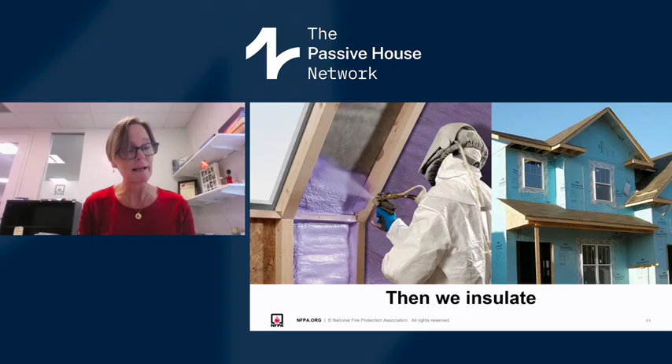Now, we want to save energy, and passive houses are fabulous to do. So what do we do? We insulate. Of course we do. And depending on the choices that we have when we insulate, it could potentially mean an additional layer of fuel. Often, for instance, spray polyurethane or adding polystyrene boards on the outside is adding a layer of fuel to this package that we have in the building. So something to consider as well.

And as we take this whole nice package of lumber, wood-based boards, and the insulation, of course, now we're going to make it all look pretty from the outside. So we wrap it up in beautiful siding and roofing to have it all weatherproofed in the end. So this is what I looked at when I said, okay, how much is there then in a building? How much fuel is there?

So I made a very simple calculation on a 2,000 square foot home, which some would say is a small home in this country. But that's what I did, and did some rough calculations on how many pounds of fuel I had in there. And these are my results. I looked at the lumber and the plywood, the foam sheathing, spray polyurethane, wood siding, asphalt shingles, and calculated based on information sheets from the manufacturers.

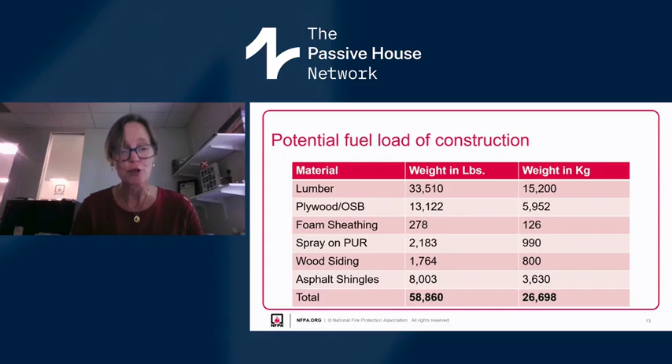I got to a total of almost 60,000 pounds of things that can burn just in the structure. So we have so much in just the building itself. I'm not looking at the interior, not even looking at floor coverings, electrical, plumbing, or anything like that. This is the raw structure. So this is the potential fuel load that we have in each of the homes we have out in these environments.

And just to give you a little bit of an idea of what that means compared to the natural environment, according to information that I found, a 50-foot tall pine tree weighs approximately 2,000 pounds. So if we have a building here with almost 60,000 pounds of combustibles, we now have what equals about thirty 50-foot tall pine trees on our property instead of a building. That's a very dense woods that will be burning there, but this is now our building instead.

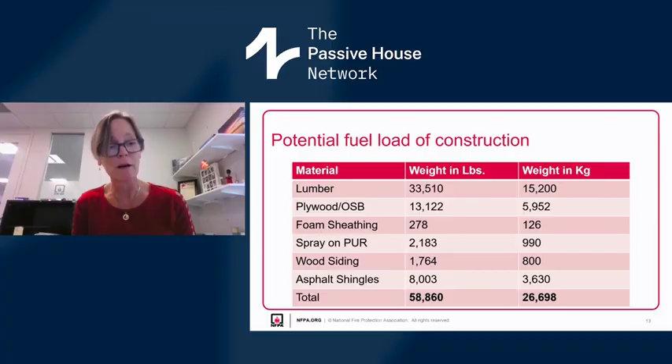You might say, why are you calculating everything? This is why. Because it burns everything that can burn when the fire gets serious enough. So we need to consider how we build the buildings. And I'm not saying that we should change our traditional way of using wood, etc. No, but what we do have to do is to think about how we can protect it when we do have such a condensed fuel package. How can we make those parts of the buildings that really interact with the fire first better protect the rest of the building?

So just to get into the resilience, resilience really has to happen through risk management. And very simple in my view, risk is hazard times consequence. And the hazards that we have out in the Wildland-Urban interface are the vegetation, the topography, the weather and the wind. And yes, we can control vegetation and we can control where we build related to the topography. Weather and wind are out of our control.

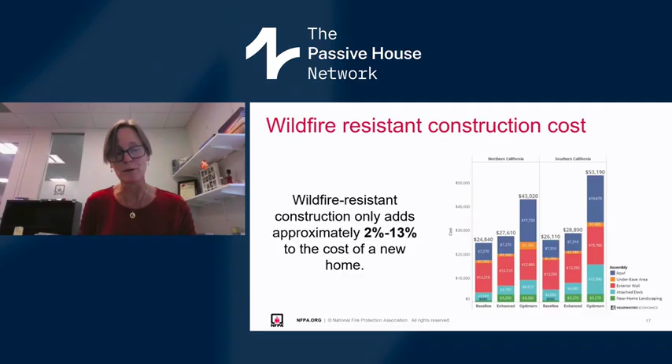They're evacuating us. Oh my God, oh my God. Holy cow. That's crazy. On December 30th, 2021, the most destructive wildfire in Colorado's history, known as the Marshall Fire, destroyed more than 1,000 homes in the suburbs of Denver and claimed the lives of 2 people. This place is burning over here.

The Sobtis were one of the many families who lost their home. Amita, her husband Manu, and their 2 kids were on vacation at the time of the fire and watched everything unfold through their security cameras. And we were on a beach, I remember, and we were in disbelief. We were like, this can't be happening, we'll be fine. But when they returned to Colorado 5 days later, they saw firsthand the damage that was done.

It was just gone, it was ashes. One car was in the garage that had blown out pretty much, and the garage door had melted and fallen on it, and the rest, everything was ash. It was a hole in the face of earth, and it was disbelief. I could not believe that the entire neighborhood was wiped out with that one fire.

Wildfires are not uncommon in Colorado, but the Marshall Fire was an outlier. Most fires affect rural parts of the state, and this fire destroyed suburban neighborhoods. And it happened in the middle of winter, leading some scientists, like Cenlin He from the National Center for Atmospheric Research, to conclude that fire season, once limited to the summer, is now a year-round threat.

The hope is that more homes in the neighborhood will sign up for the design, because the more buildings that meet passive house standards in an area, the safer that area may become. So as each house becomes more resilient to fire, it protects the neighbors, and the neighbors protect the neighborhood, and the neighborhoods protect the community. So there's this kind of cascading effect. Every good decision making the homes better actually improves the entire community as a result.

Great, thank you so much.

In California, I can tell you, $40,000 is much less than 13% of the house cost of a new build. So it's even better news in that sense for a fully rebuilt house.

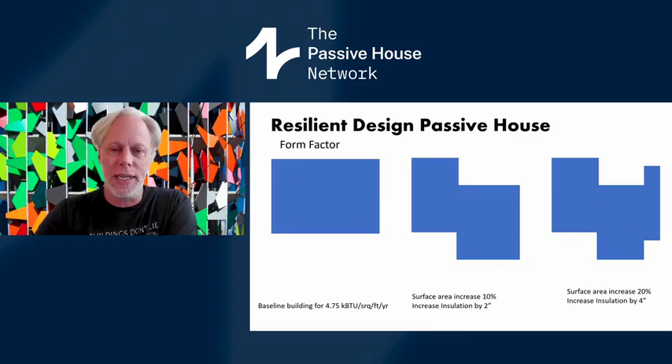And then passive house, of course, you guys all know this, that we can build different form factors. It's just that we take on a penalty of that. So we're not saying that we need to build boxes for passive house, and we don't need to build boxes for fire resilience, but it does have an impact on both terms directly.

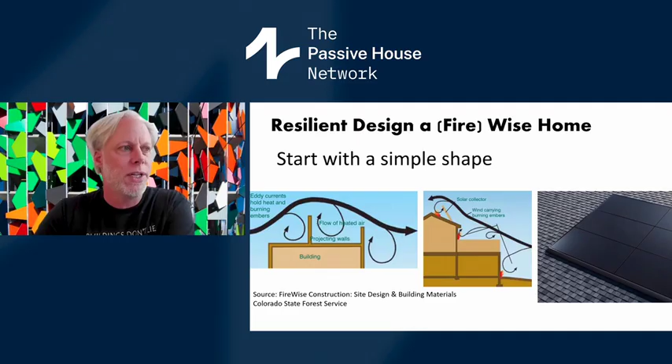And even little things like solar panels. I was looking at these Tesla solar panels, and they have this nifty trim around them, so embers can't really get underneath the solar panels, in between the roof and the solar panel, for instance. So even small details like that really count.

And then when we get into the actual fabric of the building, we often see buildings that we like to ventilate. We love ventilating roofs because we don't want rotting roofs. That's great to get rid of moisture, but that's really, really good to introduce embers into the building system. So traditionally, for almost all my houses, passive houses, including the one down in Masonville, we like to use cathedral ceilings with an unventilated roof system.

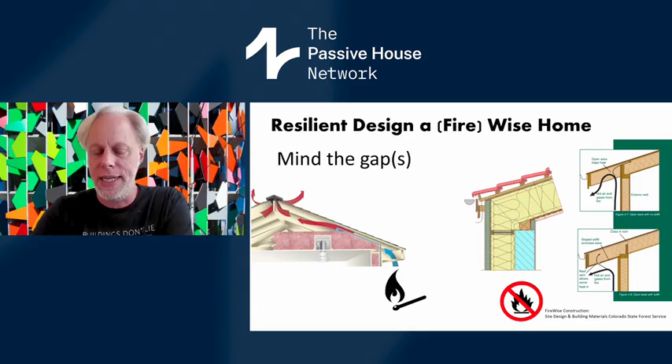That seems to have made a significant difference both in the performance of the building as well as the fire resilience. So we don't use ventilated facade systems outside of just between perhaps the exterior and the rain screen. And certainly the roof, we really don't encourage to ventilate them. And I'll show you a final detail that we are using now for fire rebuilding.

The other big thing we're finding, at least in Colorado, I've seen significant window breakage in the mountains. When we have this fuel load that's a forest right next to your house, or perhaps another house that's on fire, often the windows break, and it gives you limited time when that fire radiant front comes. That one pane, two panes break, pretty much, even if you do everything else correctly, you have a completely compromised building. So the idea of using triple pane passive house glass, preferably a little bit smaller than larger, the triple pane buys you significantly more time when that glass pane breaks, just from that first radiant fire front.

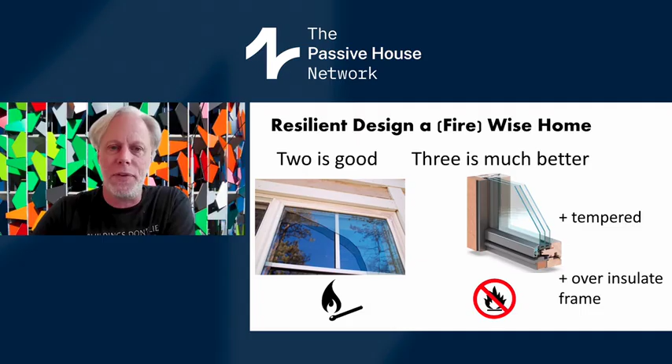The other thing that we do in passive house, which I think is really fantastic for fire resilience, is we over-insulate the frames. So the frame itself is protected from embers lodging into it, especially if we use a material that's non-combustible around the frame itself.

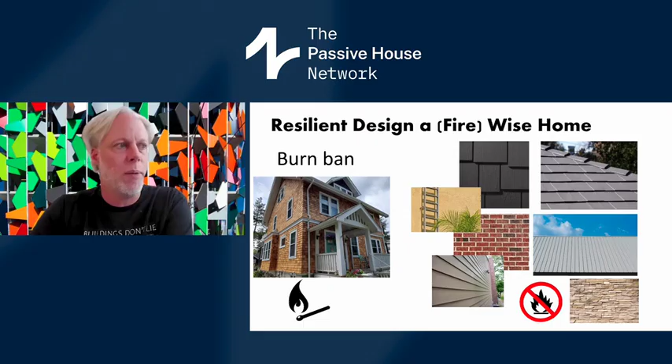And then speaking of materials, of course, we know we don't want to just clad the building in tinder, so a little fire can start right anywhere around the perimeter of the building onto the building. So, right now, of course, we have stuccos and metals and fiber cement and brick. There's a pretty significant range of great materials to work with. A lot of them are more expensive. I think this is where the cost component comes in, but they also can be significantly more durable. For instance, the metal roofs are much more durable than the asphalt shingle roofs. So we love to use those on all the projects if we can.

Here's a project right next to my house that I built, designed, I think it was completed a year before the fire on our mountain. And thinking about fire resilience, we clad the entire building in metal, the roof and the siding. And in the front, we actually used cork. And cork is a Class A fire resilient material if it has a solid substrate behind it.

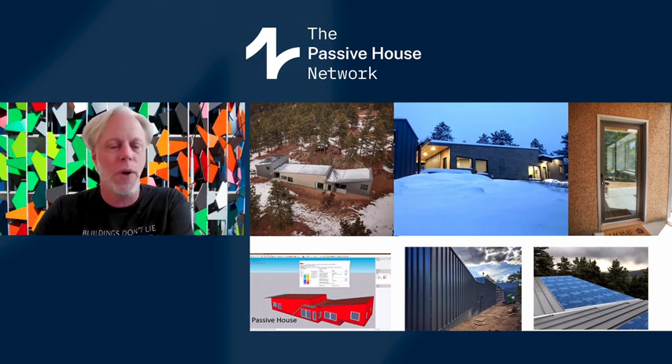So that was really interesting, not necessarily having to use stuccos or fiber cements or even metals. We can still use organic, softer materials on siding. We just have to be really careful and selective and experimental and really go out there and do research and see what works and what's available. And it feels and smells great, interestingly enough, cork.

And then once we get into the bones of the building, as we talked about earlier, spray foams are basically gasoline in solid form. They burn extremely efficiently.

So avoid them at all costs, no foam construction. But also fiberglass is not really particularly good. Air goes through fiberglass quite easily. So if you do have a fire event within your wall system, flames can get through that fairly efficiently with fiberglass. So almost exclusively, we use on interior walls a rock wool type of material, which has a melting point of like 3,700 degrees. So basically, it does not burn.

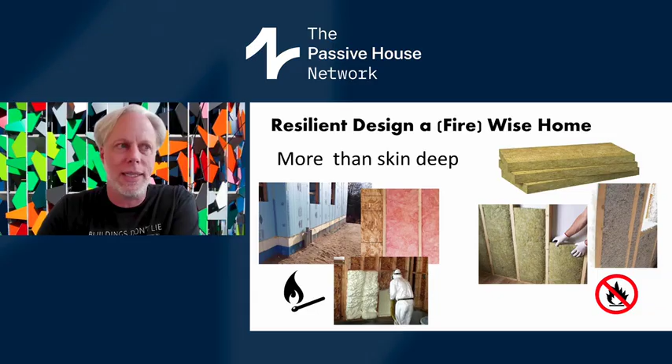And then cellulose is low embodied carbon, low cost. Also, it doesn't hold flame at all. It doesn't really melt. It's quite stable in a flame event. But most importantly, because it's dense packed, it doesn't allow air into the wall cavity. So we eliminate air; even if we have fuel, we don't have fire.

My own passive house, certified I think 8 years ago now, was the first one in Colorado. We did cellulose on the inside, rock wool on the interior wall. Cellulose is the main insulation material, and then rock wool on the outside is a board material. So 2 inches of that material. It's quite rigid, so I found it to be pretty easy to work with.

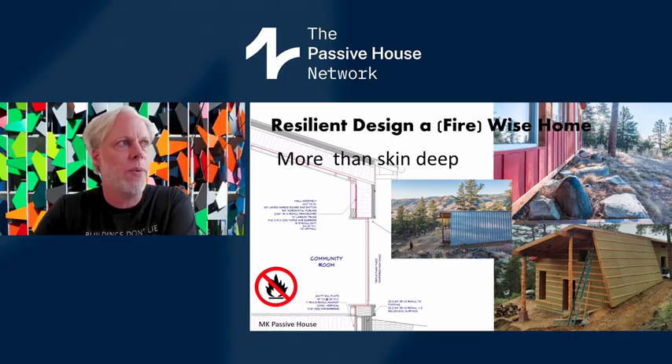And then we used metal for siding and fiber cement over that. So it's a pretty fire resilient wall, especially with the triple pane windows. I used uPVC for the frames, so that might be the weak point in this particular building system.

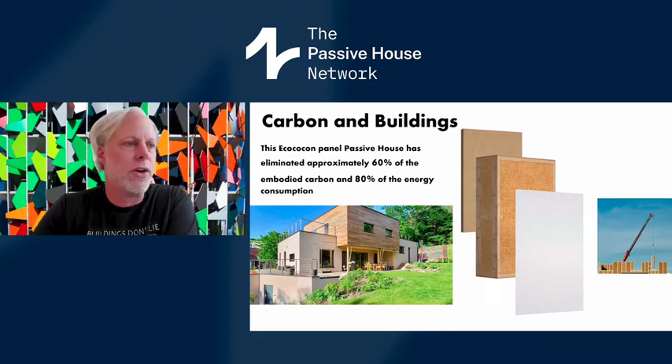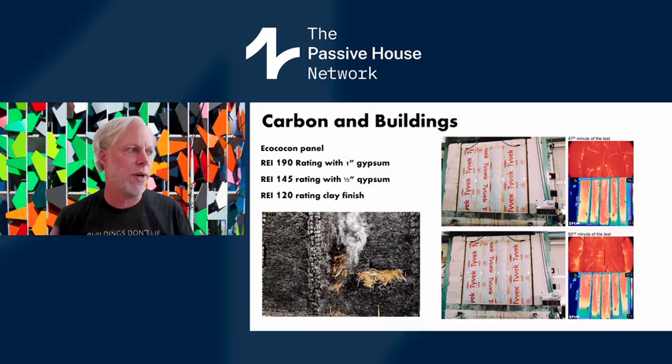And then when we look at lower carbon materials, EcoCocon panels, for instance, are a prefabricated panel made of compacted straw. And straw is incredibly fire resilient. In fact, it can give you a 190 minute rating if you put a gyp board on the inside of it. Because of that lack of oxygen, straw itself, when it's compacted, does not support flame really at all.

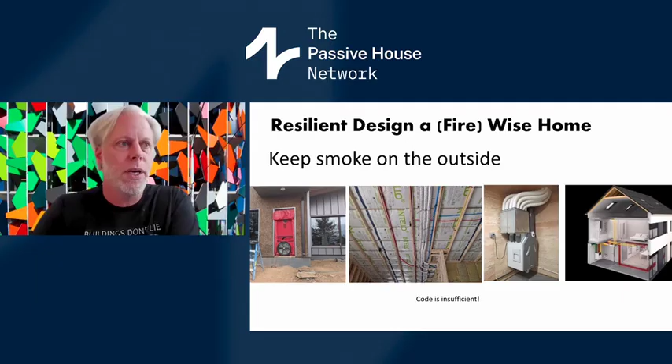And then, of course, the other side we don't talk about. Most people aren't going to be affected directly by fire, but by fire smoke. Massachusetts right now, all over the Pacific Northwest, California, Colorado, it's become a regular event. So passive house naturally is airtight with ventilation. We can do quite a bit with that ventilation in terms of controlling the air coming into the building.

And a quick test they did in Australia, in Canberra, the capital. There are 2 passive houses built by this architect, extremely thoughtfully done buildings, the exact same building twice. In one building, they actually tested how airtightness during an extreme smoke event affected the building.

On the left-hand side, you can see that the outside air is quite polluted with 600 ppm, or I forget exactly what. I'm not a metric guy, so I'm not exactly sure what that size is, but relatively speaking, the blue line's the outside. The red line is a typical house, and then the yellow line is a passive house.

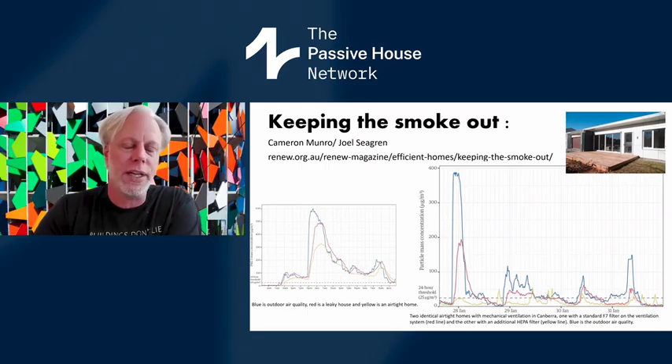So the passive house is half of what is outside, quite significantly better than a typical house in the city. But once we compare that to a passive house with an F7 filter, the equivalent of a MERV 13 filter, compared to the standard passive house without high quality filtration, it brings the level down to what's considered healthy indoor air quality, even in extreme smoke events. So that should be standard building practice for anybody who has a potential smoke event.

For the fire rebuilding for the Marshall Fire, which destroyed about 1,000 homes 2 years ago in December 2021 in Boulder County, we lost a lot of houses. So we're rebuilding a number of fire houses called the Restore House. And we've been going back and forth quite a bit on the detailing, especially with the roof system.

In this case, we decided that we can ventilate the roof. According to code, we need to ventilate the roof systems, which is exactly what we don't want for a fire condition. So we're doing a perimeter vent around the entire roof system, with about a 3/4 inch gap between the insulation system and the roof decking, putting a fireproof membrane, and then a metal roof on top of that. That's one of the many details we're doing. We're also wrapping in the 2-inch rock wool board.

And we feel that this will be a pretty fire resilient building, even as these neighborhoods go up, if the neighborhood house next to it goes. We hope and feel somewhat confident that this house is survivable in that condition. And even with the extreme fire event, just the ventilation system, we're putting these ember blocking vents into the HRV intake. So if there's a fire event coming, basically the vent will swell shut and close off the house to active embers coming into the building.

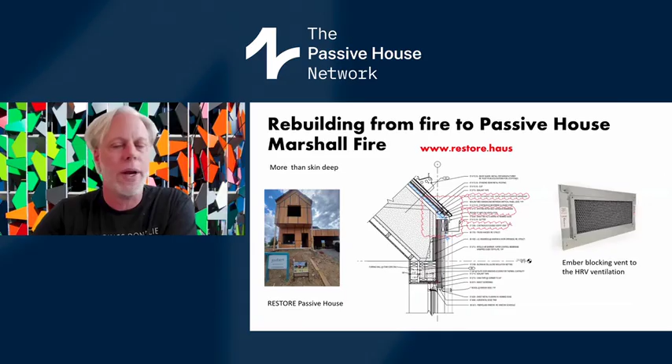So it's those little details we're constantly looking at, trying to think of. There's more to learn to come, but this is kind of a good start. And the synergies between what we're learning with typical classic passive house detailing and then adding the fire resilience is a very, very small lift. And it's just a matter of adding a couple of extra details and material selections that make these buildings work quite well, I think. So that's the end of my presentation.

Hi, everybody. I'm Rob Nicely. I'm a general contractor in California. I own a company called Carmel Building and Design. We work on the Central Coast area, and my part to add is to take a look at a house that we built that survived a fire late in construction.

And something that was noteworthy about this project for me was that this was the first client I ever had who actually came to me wanting a passive house. And because they lived in an area where the risk of fire was high, they also explicitly said that they wanted the house to be very resistant to fire. So an ideal client in that way. This house is far out Carmel Valley, past the point where there's a lot of people.

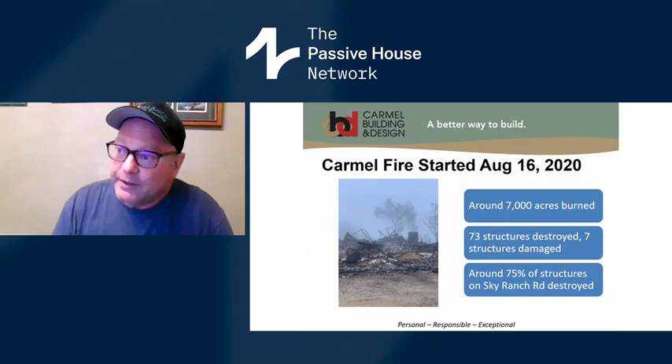And again, this house was under construction when the Carmel fire happened in the summer of 2020. This was really the center of where that fire was, and it's on a ridge, very steep incline, and so the fire just rushed up to the top of the hill. And as a consequence, most of the houses on that street burned, were completely destroyed during the course of the fire. So this is a picture of the remains of one of the houses on the street.

It was a small fire, and this isn't a very heavily populated area, but again, we were right sort of in the worst place. This is looking off the back deck down towards the neighbor's house, which was destroyed. So we were far enough along that our framing was covered up. And so I just want to run through the materials and strategies we used. Andrew talked about a simple building form. And again, because this was a passive house, the clients explicitly wanted that.

We had a simple form, and the long axis was oriented so that we had a really good southern exposure, which also coincidentally and happily faced them to the Los Padres National Forest and this beautiful view. In this case, we wrapped the house with exterior insulation, 2¼ inch Gutex, which is a wood fiber product, but very, very slow to catch fire. In fact, on the Gutex website, they show the test where they hold a blowtorch on it for 20 minutes and then look at how much charring you get. So very difficult to ignite.

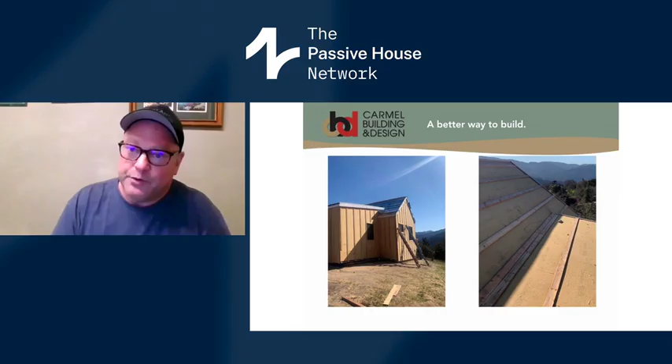This is the only time I've used this product. Normally we use rock wool. I'm doing another certified passive house right now where we're using rock wool, which can be the exterior board insulation, and also it comes in batts or blown in material that you can put in the framed cavities as well. The exterior finishes were stucco and Hardie board, cement board, horizontal siding. The roofing material was steel standing seam roof. We had triple pane windows.

And the only area that we had that was, you can see that the whole house doesn't have any eaves. So there was no condition where we needed to deal with the eaves. The area pictured here, the entry, was the only place where we had a small area that was outside of the conditioned space. And so this was the only place where we needed vents.

And we put in a couple of Vulcan vents, which are of the type that Andrew mentioned, that when they heat up, they swell shut. So you weren't going to get air infiltration or embers going into the building through that. So again, simple form, fireproof materials, and this is just how you execute a building that performs at a really high level in terms of its energy load and also resistive to fire.